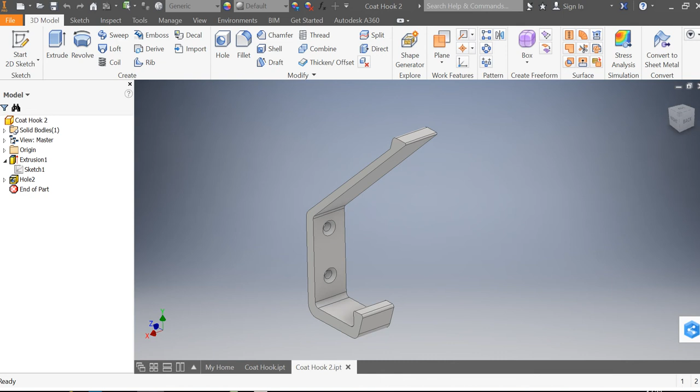Hello and welcome back. What we're going to do in this video is create some two-dimensional drawings from this three-dimensional object. The idea is we're going to imagine presenting this coat hook to a manufacturer, and they'll be able to take all the information they need from our drawing to go ahead and make it.

So we're going to go to the new feature, go to new, and we want to create an annotated document. I'm going to click on AM_ISO1 and create, and our page will look something like this. It's going to come up with an attribute box that we can enter values into, but I'm going to leave that alone for now. I'll click OK, and our page will look like this.

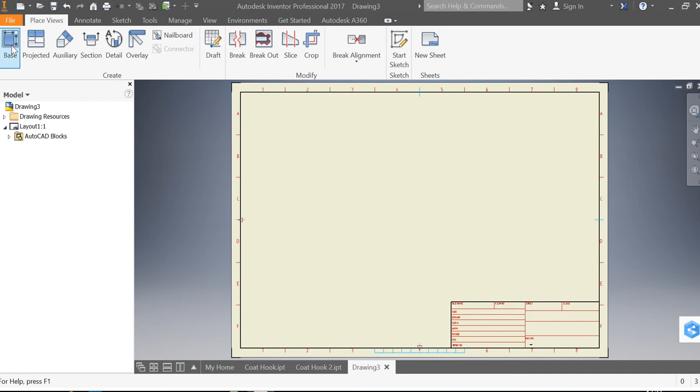We then want to put in our item, and we start off with the base view. As the last drawing we were working on is the coat hook, it's brought that in for me as if by magic. I'm just going to flip round to the back view here because I want to start off with the front view, looking directly at the front of it, and it's drawn in a scale of 1 to 1.

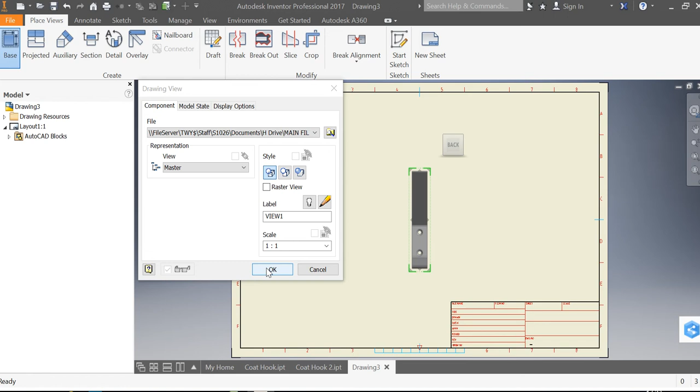If we're drawing something much bigger, we might want a more appropriate scale - it might be 1 to 2, 1 to 5, 1 to 10, 1 to 50, but 1 to 1 is okay here. So I'm going to click OK, and that's turned it from a 3D drawing into a 2D view. You'll notice it's got some features, our holes, and some hidden detail, which we'll look at in a minute.

I'm just going to shift that across to the side. I'm arranging my drawing space because I want to bring in some more views. We're going to create an orthographic drawing here.

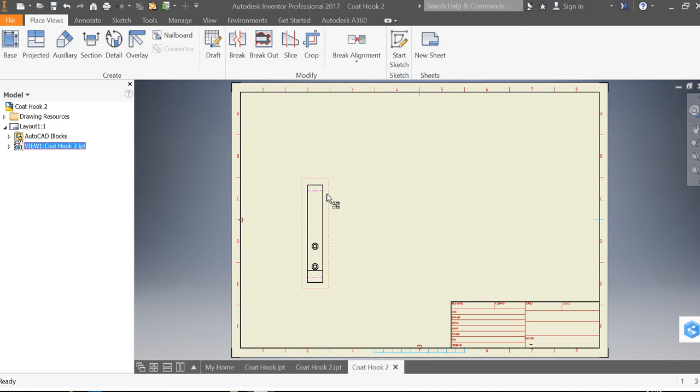So to do that, I want a side view and a top view. I'm going to go to projected here, and it's going to project views away from the base view we've inserted. So we've got the side view there, and bringing it in that way, the top view there. If I right click and create, it's then going to create our orthographic drawing.

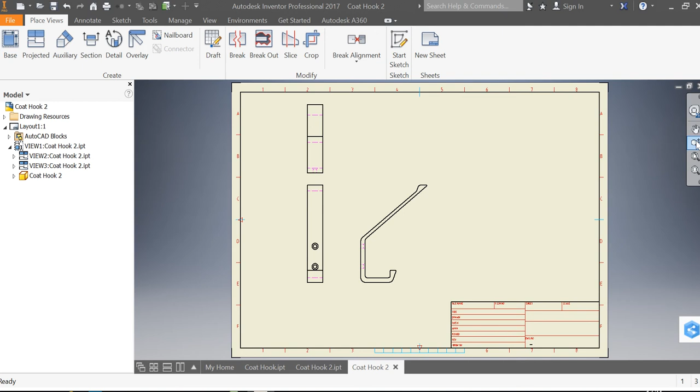So just to go back to this issue of hidden detail, if we look here, we'll notice it's showing things that we know are there but we can't see. So we've got our holes for our screws that are just there.

So I'm going to zoom out again, and we might want to put some sizes on it. We're going to go to the top here and annotate, and we're going to dimension, and this gives us the opportunity to put some sizes in. If someone was to take this drawing and go make it, they'd need sizes.

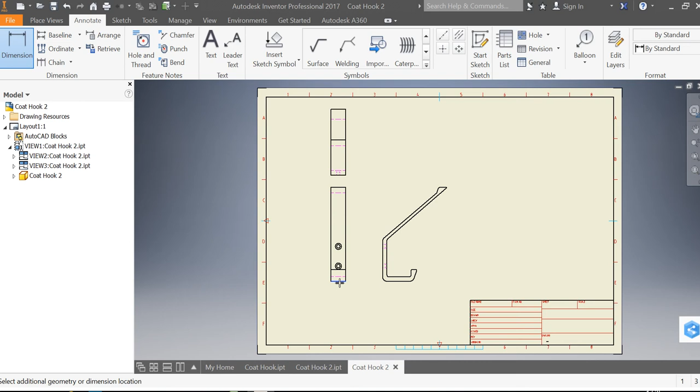So I'd like you to experiment with this. I've just selected that line - it went red when I hovered over it, blue when I selected it, and if I left click now, it's going to bring that dimension away. I can edit the dimension. I'm happy with that as it is, and I'll click OK, and it's showing me it's 17 millimeters.

Now, as there's lots of different lines going on here, I want to measure from top to bottom, so I'm going to click that top left-hand corner. It goes green, and the bottom left-hand corner there - not quite hit the point I wanted, so I'm going to try again. Dimension, top left there, bottom left there, a size from top to bottom, and OK.

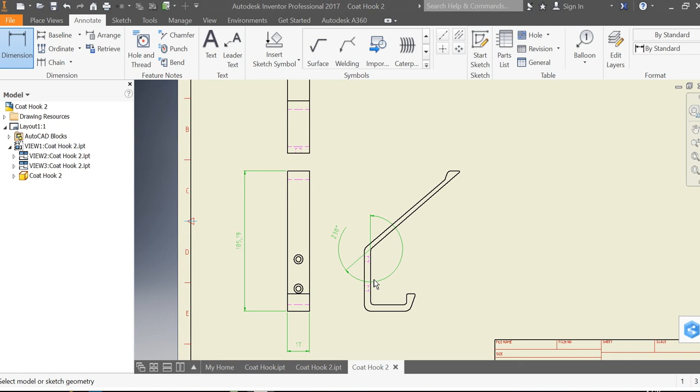It can even put angular dimensions in, so the angle from there to there, and I'm going to put that in, and it's showing me that's at 218 degrees. We might want the size of this line, so I'm just dragging a dimension from there, and the more detail we can put on this, the better, because that will enable the manufacturer to make it to the exact size we want. Another green dot there to the green dot there, drag it away, and we're getting as many sizes on here as possible.

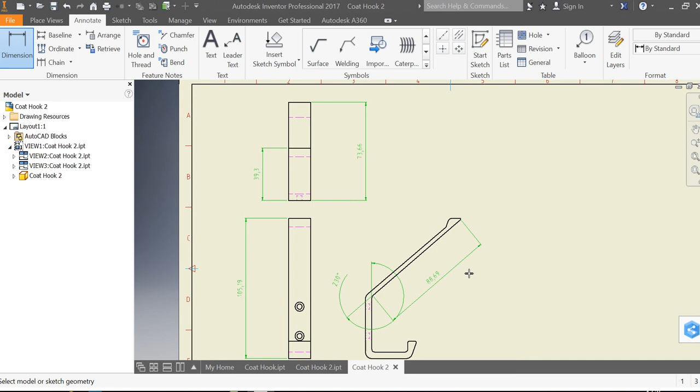Okay, and I'm going to pan now, and I might want the size, the inside from there to there, and that is 27 point... and so on and so forth.

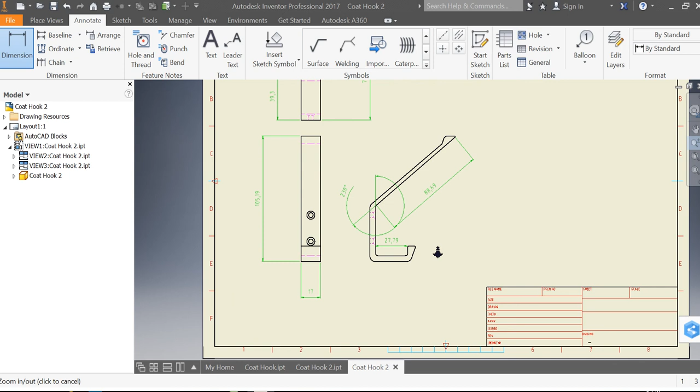So I'm going to zoom out to give you an idea of what we're trying to achieve. We're kind of trying to achieve a drawing with as many sizes on there as we can get, so the manufacturer will be able to make it. Hope you succeeded with that.